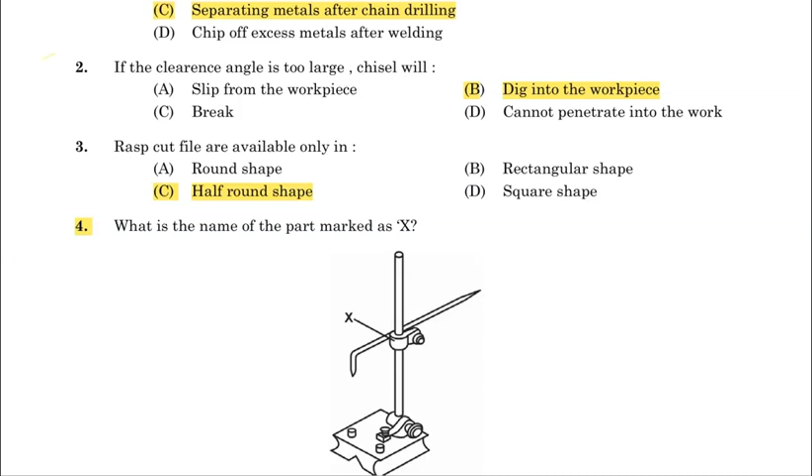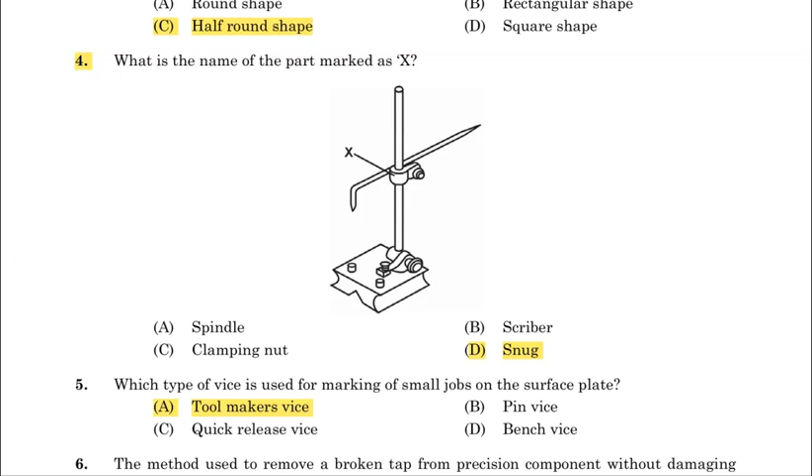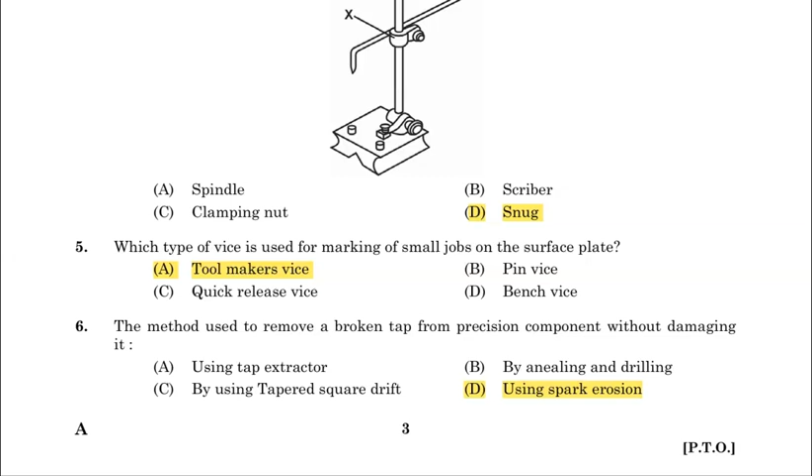A. Tool maker's vise. 6. The method used to remove a broken tap from a precision component without damaging it. D. Using spark erosion.

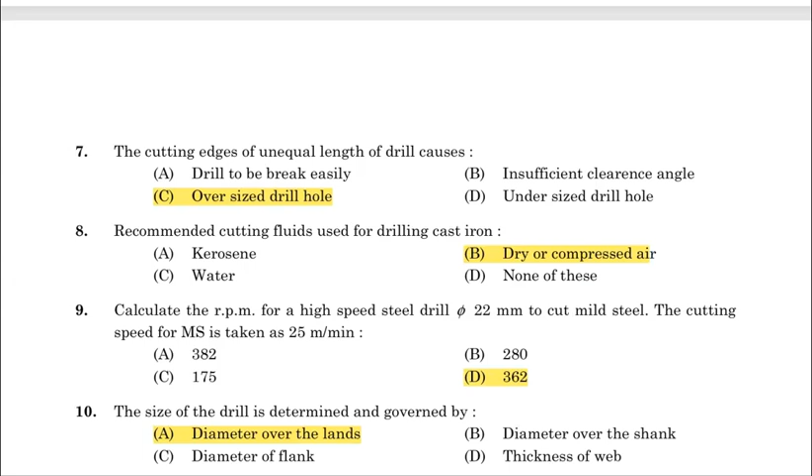7. The cutting edges of unequal length of drill causes oversized drill hole. 8. Recommended cutting fluid used for drilling cast iron. B. Dry or compressed air.

9. Calculate the RPM for a high-speed steel drill of 22 mm to cut mild steel. The cutting speed for MS is taken as 25 meter per minute. D is 362.

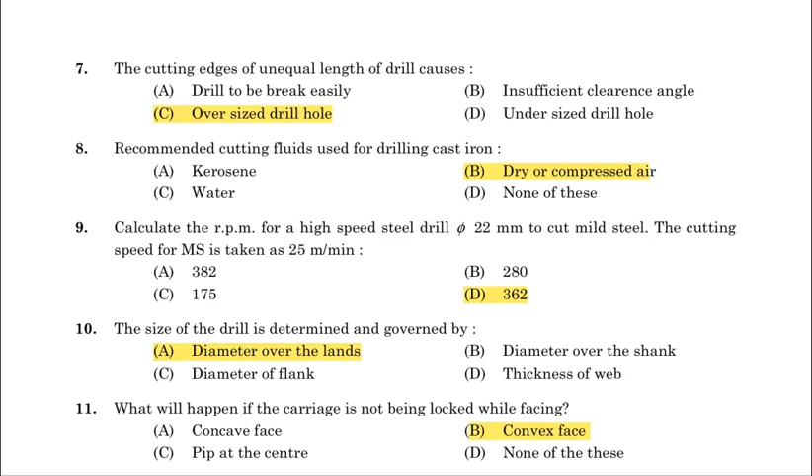10. The size of the drill is determined and governed by diameter over the lands. 11. What will happen if the carriage is not being locked while facing? B. Convex face. 12. What is the name of the center shown in the figure? D is tipped center.

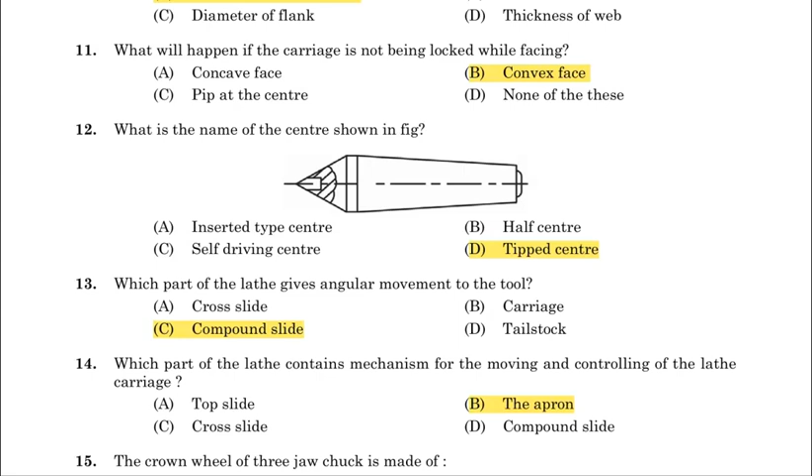13. Which part of the lathe gives angular movement to the tool? C. Compound slide. 14. Which part of the lathe contains the mechanism for moving and controlling the lathe carriage? B. The apron. 15. The crown wheel of 3-jaw chuck is made of C.

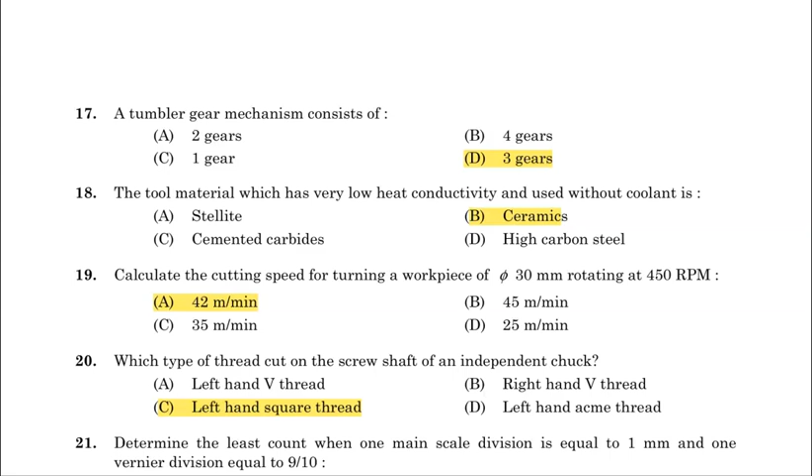Alloy steel. 16. What is an example of ferrous tool material? A. High speed steel. 17. A tumbler gear mechanism consists of D. 3 gears. 18. The tool material which has very low heat conductivity and is used without coolant is B.

Ceramics. 19. Calculate the cutting speed for turning a workpiece of 30 mm rotating at 450 rotations per minute. A is 42 meter per minute.

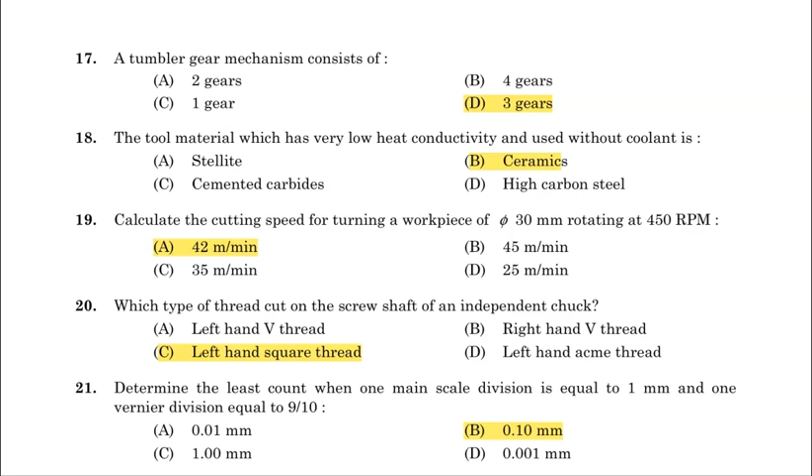20. Which type of thread is cut on the screw shaft of an independent chuck? C. Left hand square thread.

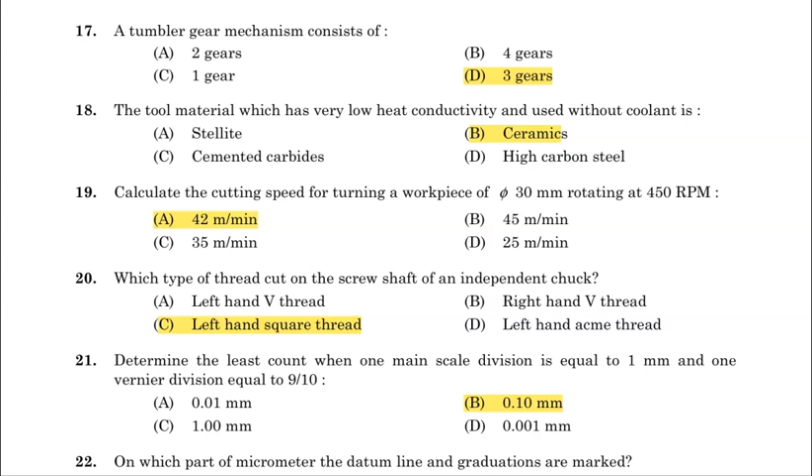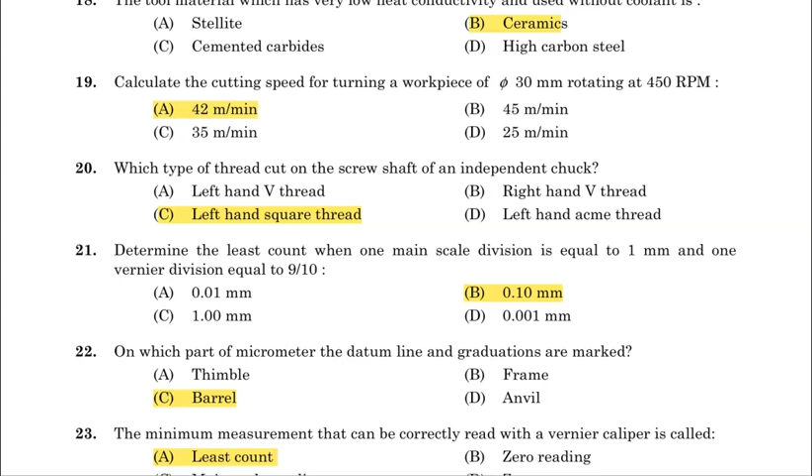21. Determine the least count when one main scale division is equal to 1 mm and one vernier division is equal to 9/10. So B. 0.10 mm. 22. On which part of the micrometer are the datum line and graduations marked? C. Barrel.

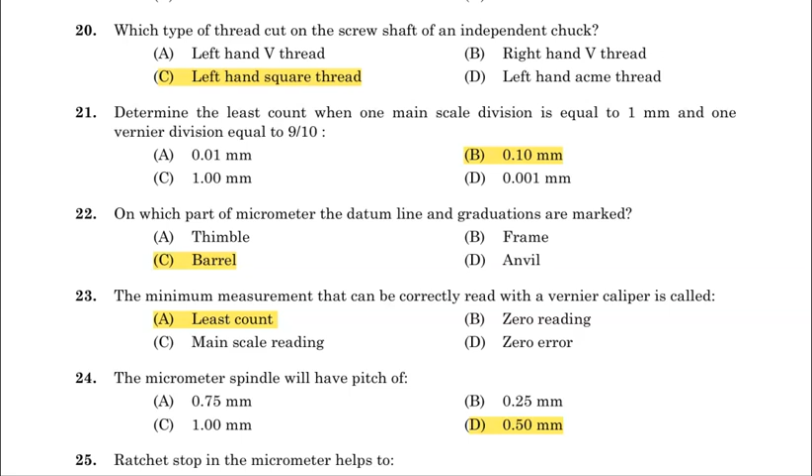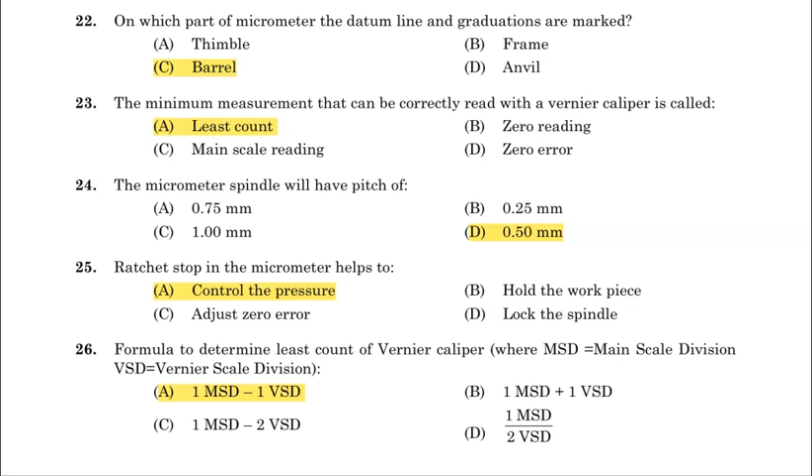25. Ratchet stop in the micrometer helps to A. Control the pressure. 26. Formula to determine least count of vernier caliper where MSD is A. 1 MSD minus 1 VSD - main scale division and vernier scale division.

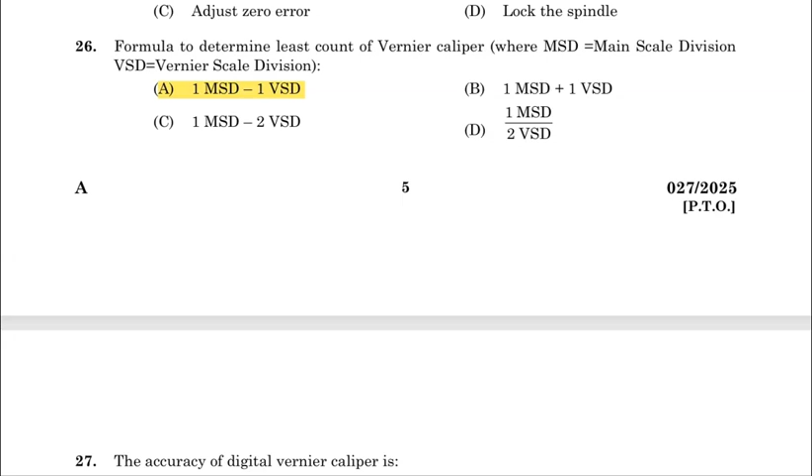27. The accuracy of a digital vernier caliper is D. 0.01 mm. 28. In a micrometer, the zero of the thimble rests below the datum line of the sleeve. The error is called positive error.

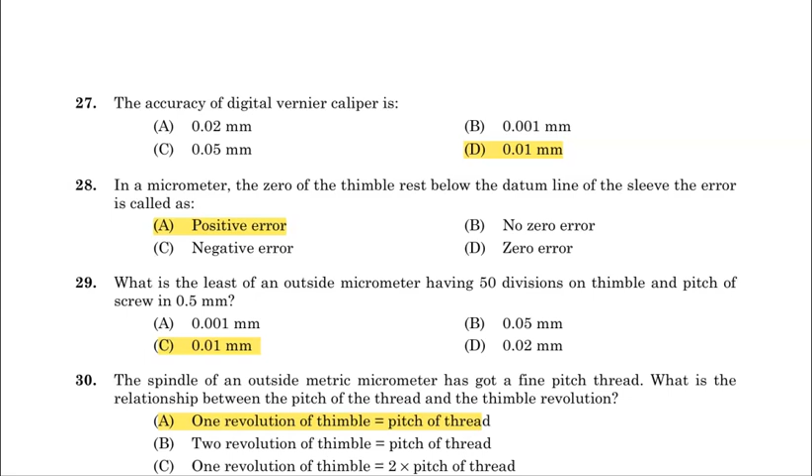29. What is the least count of an outside micrometer having 50 divisions on the thimble and pitch of screw of 0.5 mm? C. 0.01 mm. 30. The spindle of an outside metric micrometer has got a fine pitch thread.

What is the relationship between the pitch of the thread and the thimble revolution? A is 1 revolution of thimble equals pitch of thread. 31. Difference in measurement between the machined and the unmachined diameter is known as A. Depth of cut. 32. Which type of micrometer is used to check the pitch diameter of a screw rod? C. Screw thread micrometer.

33. Which range of cutting speed is set for drilling mild steel using an HSS drill? B. 20 to 30 meter per minute.

34. Measuring errors which are due to the measuring instrument are known as systematic errors.

35. The rate at which the drill advances into the material for each rotation of the drill is termed as feed.

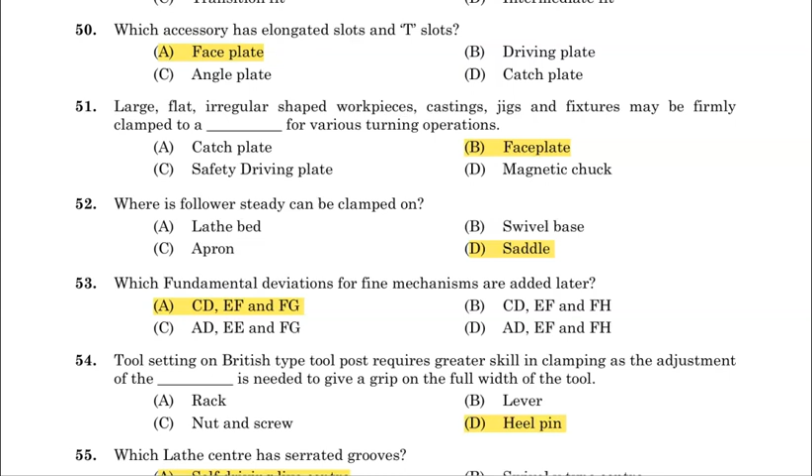55. Which lathe center has serrated grooves? Self-driving lathe center.

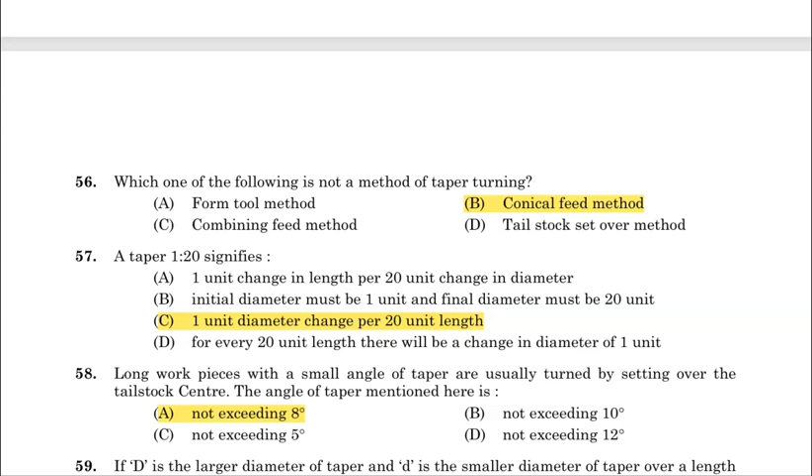56. Which one of the following is not a method of taper turning? Conical feed method.

57. A taper of 1:20 signifies 1 unit diameter change per 20 units of length.

58. Long workpieces with a small angle of taper are usually turned by setting over the tailstock center. The angle of taper mentioned here is not exceeding 8 degrees.

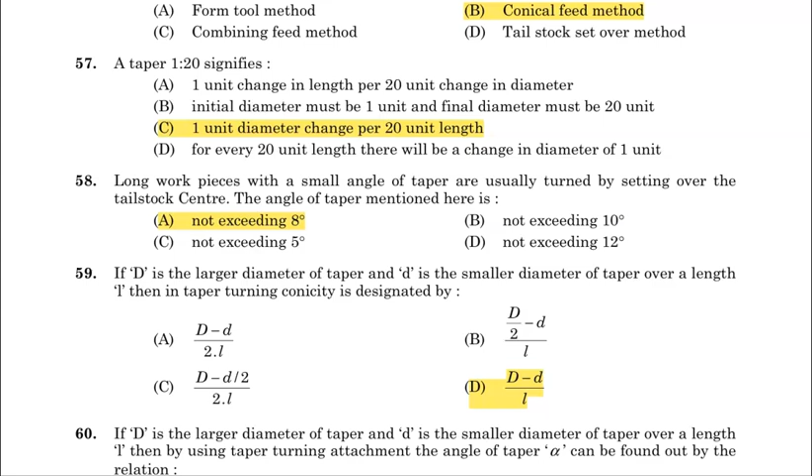59. If D is the larger diameter of the taper and small d is the smaller diameter of the taper over a length L, then in taper turning, conicity is designated by (D minus d) divided by L.

60. If D is the larger diameter of taper and small d is the smaller diameter of taper over a length L, then by using a taper turning attachment, the angle of taper alpha can be found out by the relation: tan alpha equals (D minus d) divided by 2 into L.

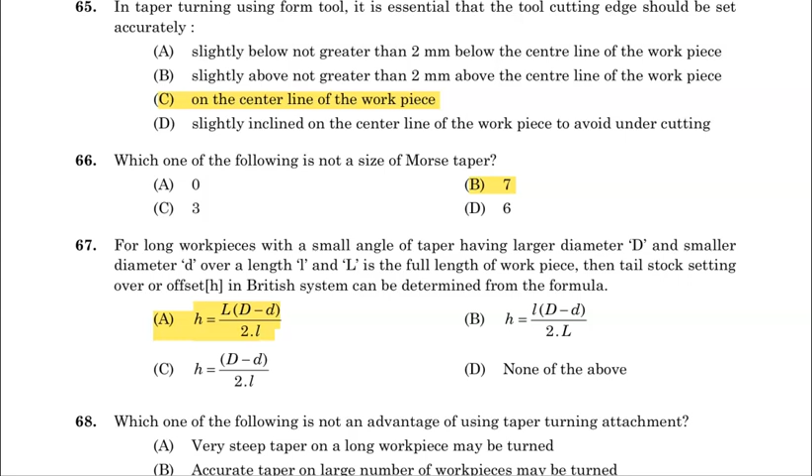66. Which one of the following is not a size of Morse taper? 7.

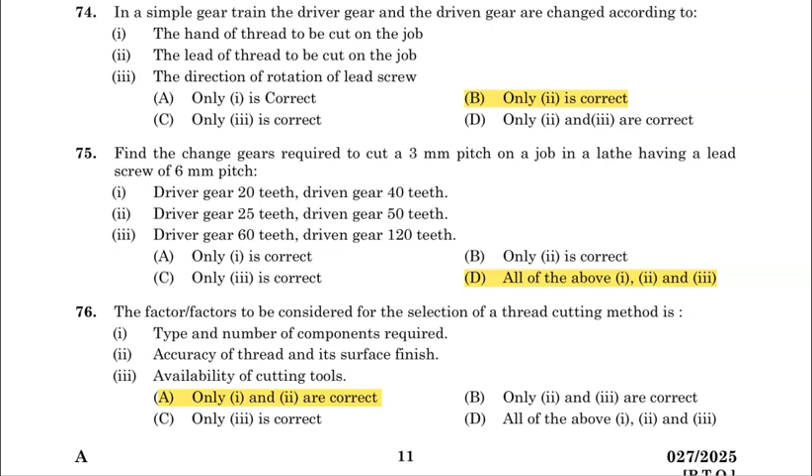Question 76: the factors to be considered for the selection of a thread cutting method are 1 and 2, so the answer is A. Question 77: helix, the second option is correct.

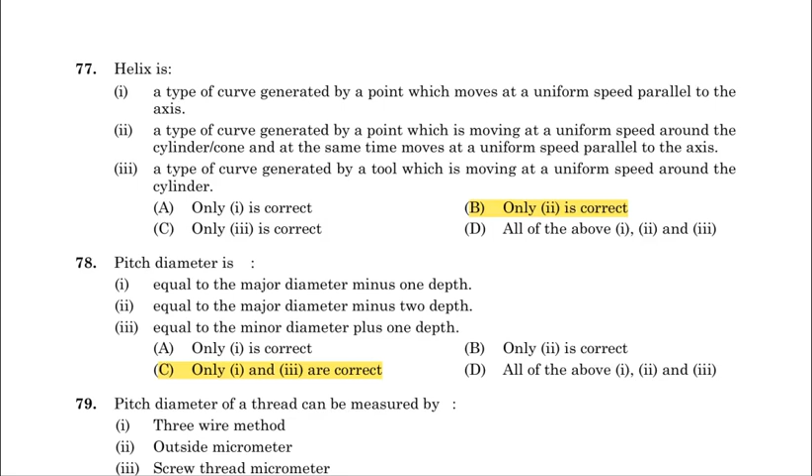Question 80: the helix angle of a thread can be calculated by the formula, the answer is D: tan alpha equals lead by pitch diameter.

Question 81: in a unified thread form, the answer is C, crest and root are flat.

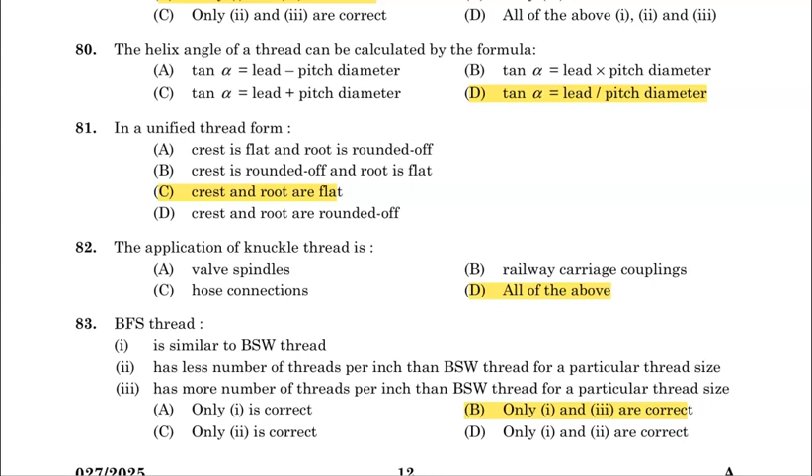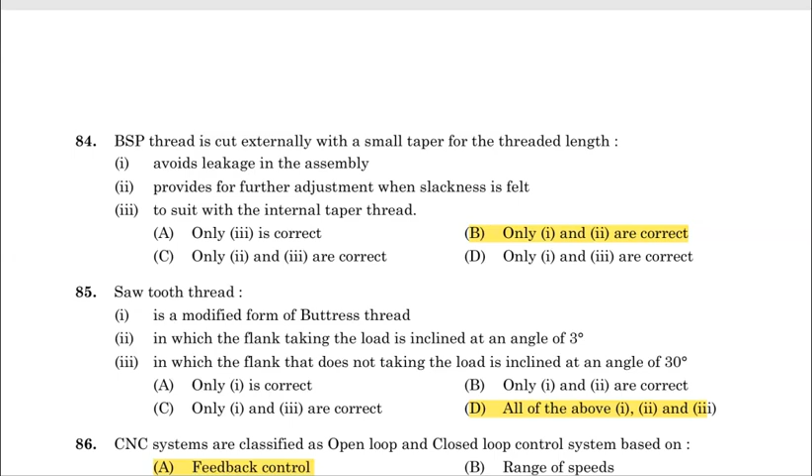Question 84: BSP thread is cut externally with a small taper for the threaded length; 1 and 2 are correct, so the answer is B. Question 85: for saw tooth thread, all the options given here are correct, so the answer is D, all of the above.

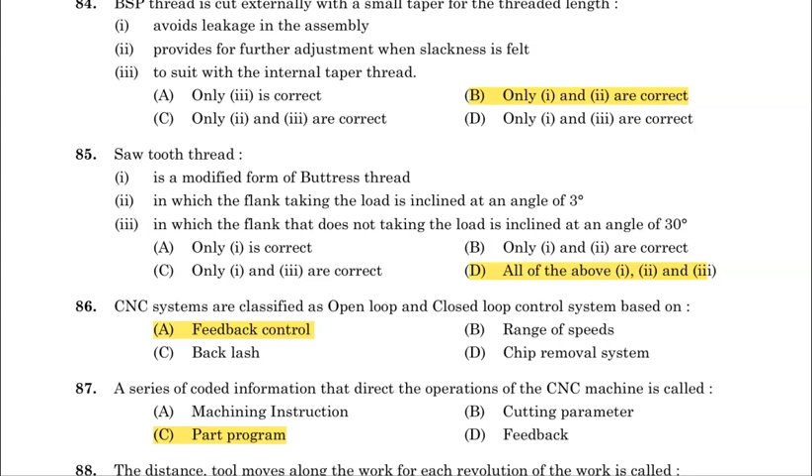Question 86: CNC systems are classified as open loop and closed loop control systems based on feedback control. Question 87: a series of coded information that directs the operations of the CNC machine is called the part program.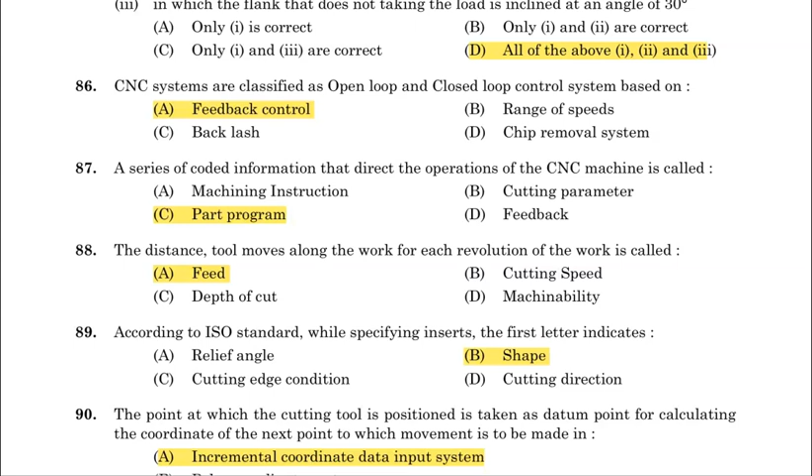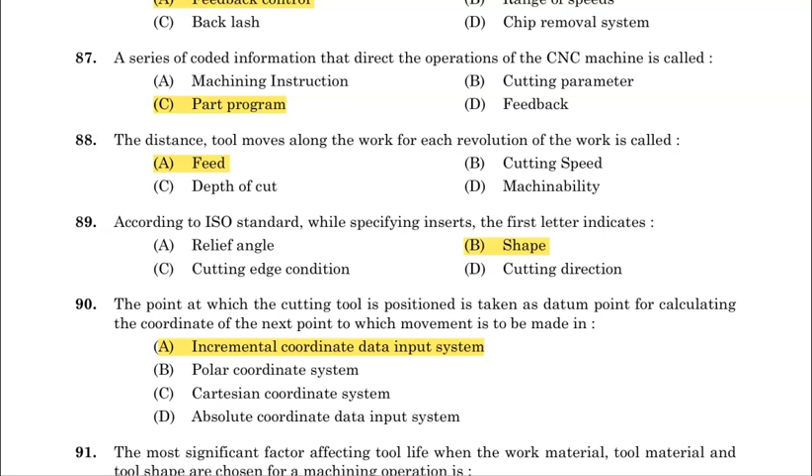Question 88: the distance the tool moves along the work for each revolution of the work is called feed. Question 89: according to ISO standard, while specifying inserts, the first letter indicates shape, so the answer is B. Question 90: the point at which the cutting tool is positioned is taken as the datum point for calculating the coordinate of the next point to which movement is to be made, in incremental coordinate data input system, the answer is A.

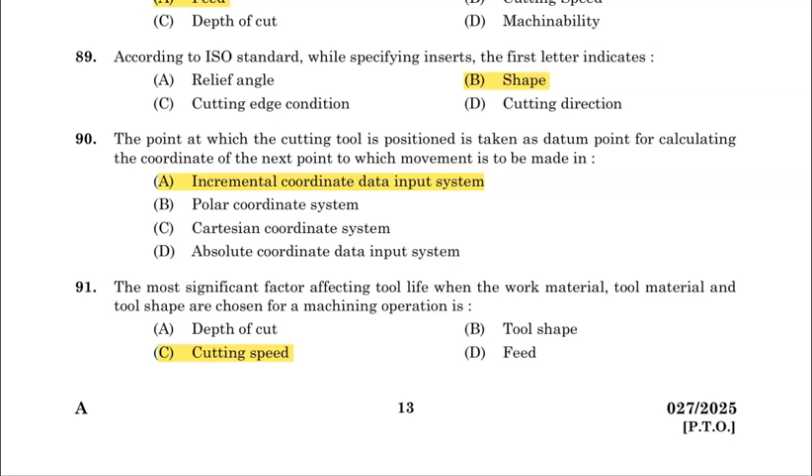Question 91: the most significant factor affecting tool life, when the work material, tool material and tool shape are chosen for the machining operation, is cutting speed, the answer is C.

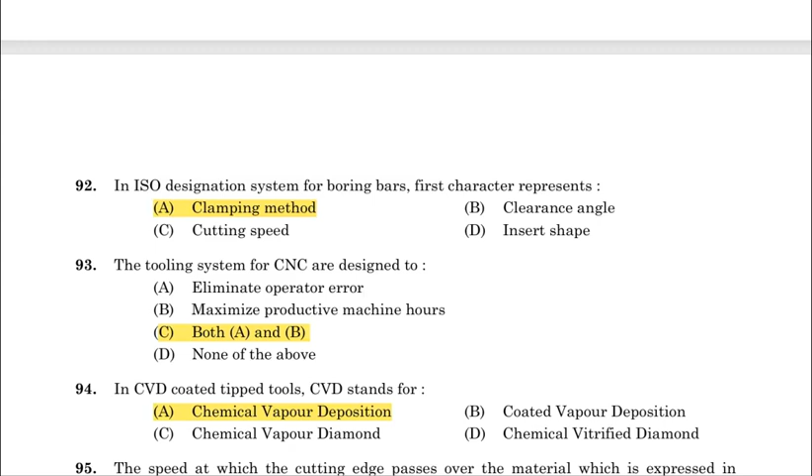Question 92: in the ISO designation system for boring bars, the first character represents clamping method, the answer is A.

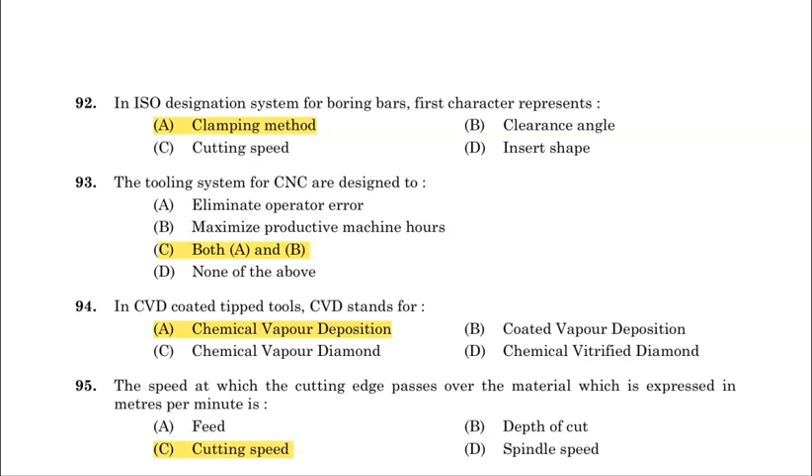Question 93: the tooling system for CNC is designed to eliminate operator error and maximize productive machine hours. Both A and B are correct, so the answer is C.

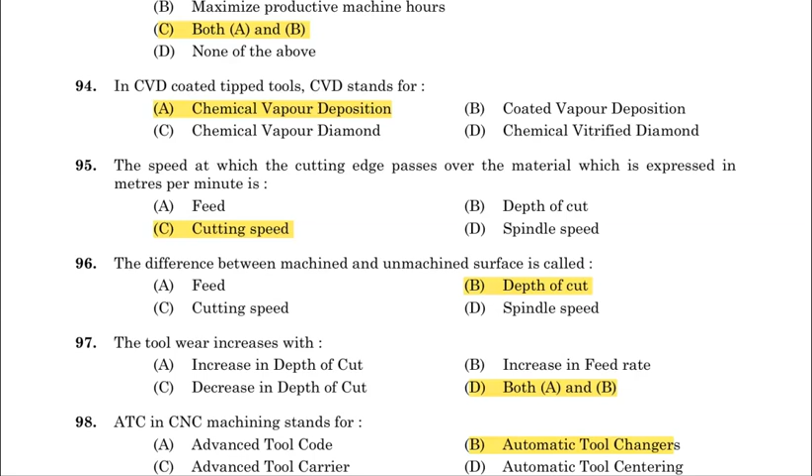Question 94: in CVD coated tipped tool, CVD stands for chemical vapor deposition, the answer is A. Question 95: the speed at which the cutting edge passes over the material, expressed in meters per minute, is cutting speed, the answer is C. Question 96: the difference between machined and unmachined surface is called depth of cut, the answer is B.

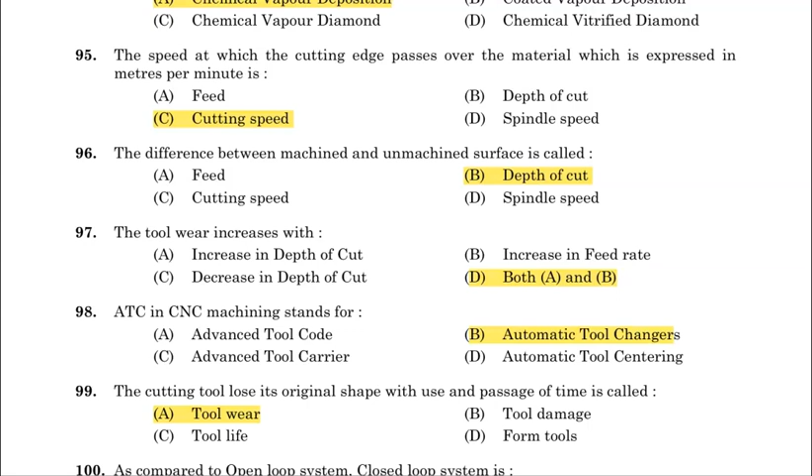Question 97: tool wear increases with increase in depth of cut and increase in feed rate, so the answer is D. Question 98: ATC in CNC machining stands for automatic tool changer, the answer is B.

Question 99: the cutting tool losing its original shape with the use and passage of time is called tool wear, the answer is A. Question 100: as compared to open loop system, closed loop system is more accurate and more expensive.